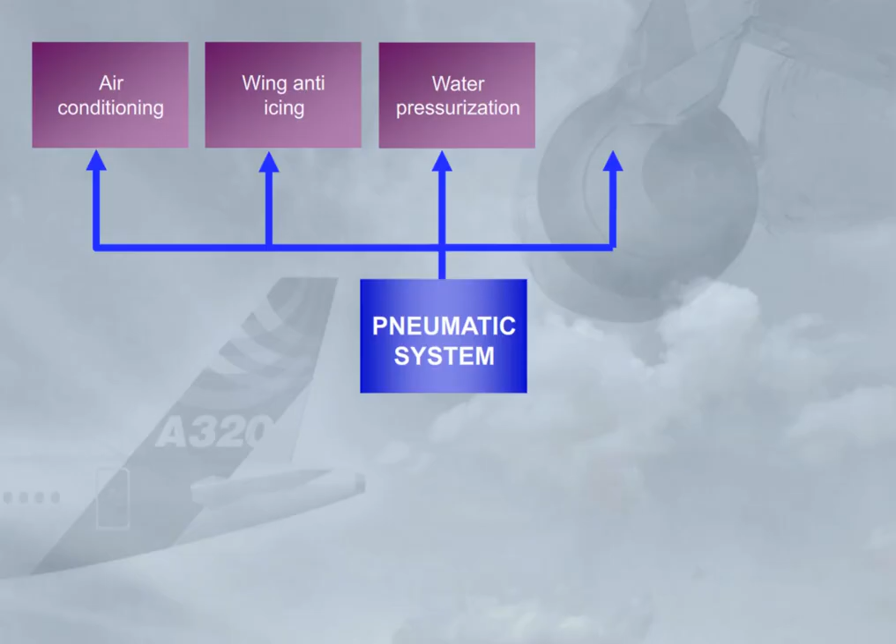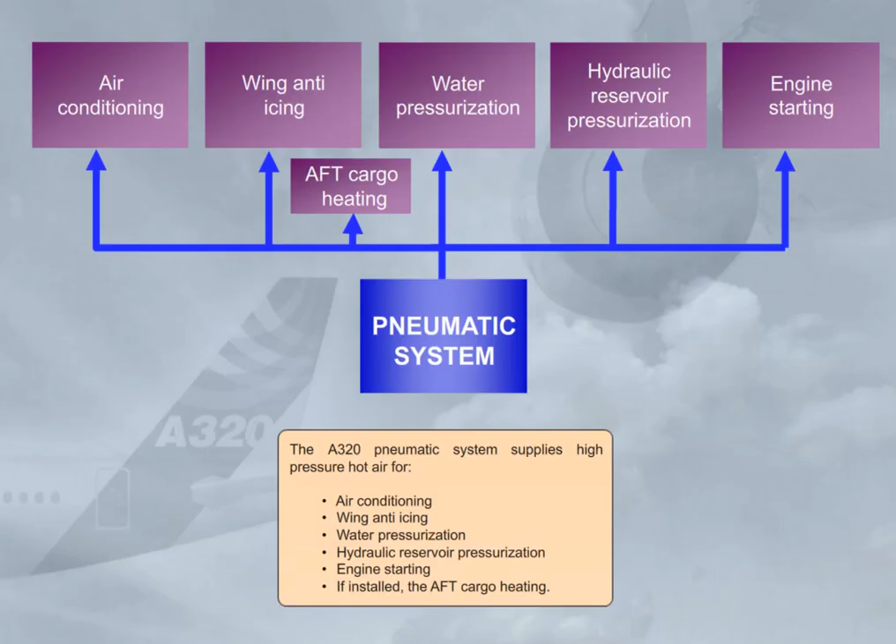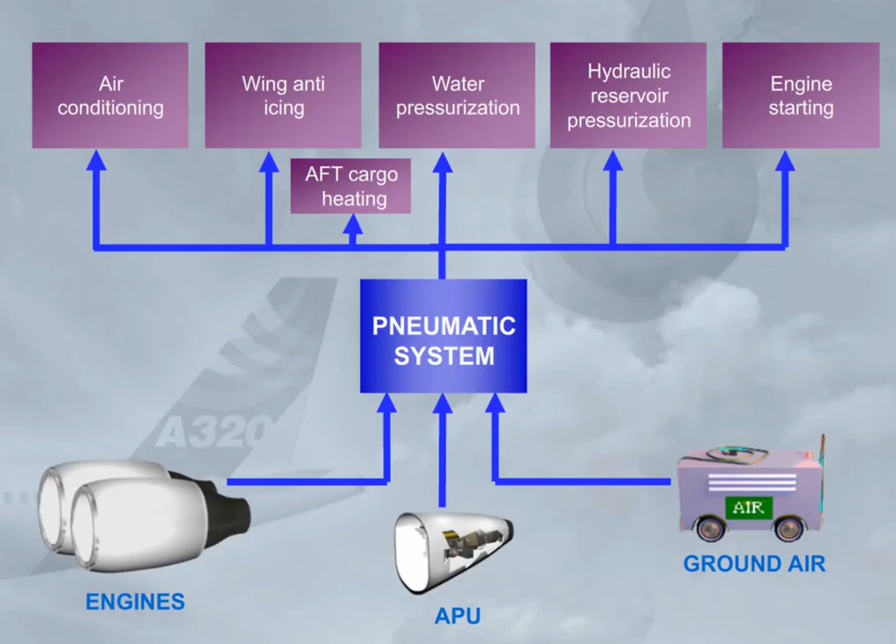The A320 pneumatic system supplies high-pressure hot air for air conditioning, wing anti-icing, water pressurization, hydraulic reservoir pressurization, engine starting, and, if installed, the aft cargo heating. High-pressure hot air can be supplied from 3 sources: the engine bleed system, the APU, or an external high-pressure ground air unit. Note: wing anti-icing is not permitted when the pneumatic system is supplied by the APU bleed.

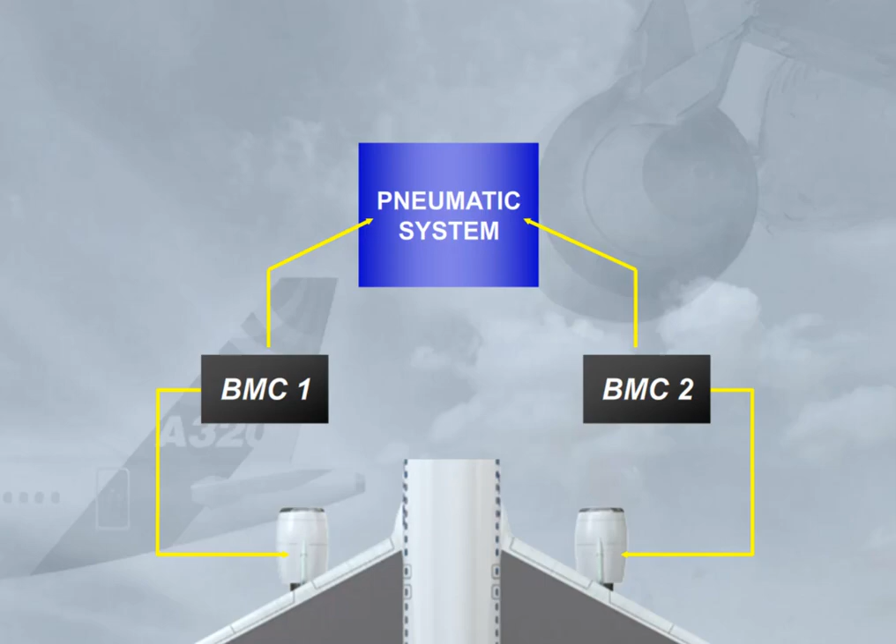The pneumatic system is controlled and monitored by 2 bleed monitoring computers, BMC. There is 1 BMC for each engine bleed system. Both BMCs are interconnected, and if one fails, the other takes over most of its functions.

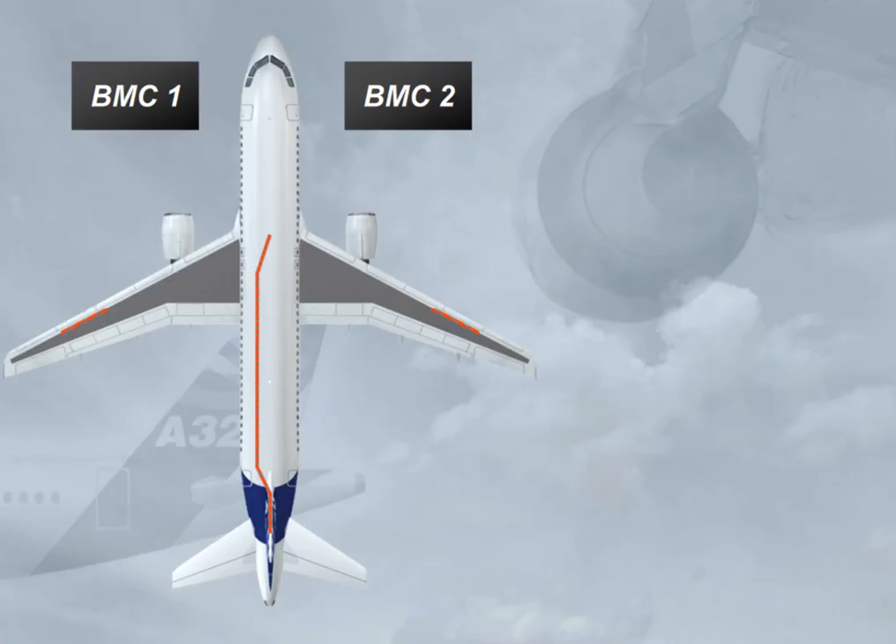An ambient overheat in the vicinity of the hot air ducts, in the fuselage, wings, and pylons will be detected by air leakage detection loops. If a leak is detected, a signal is sent to the BMCs, which automatically isolate the affected area.

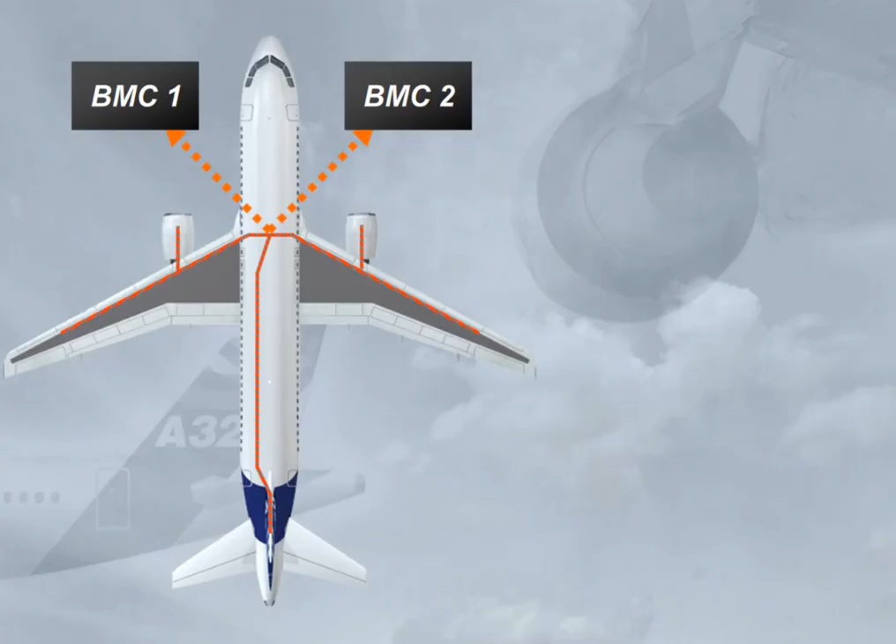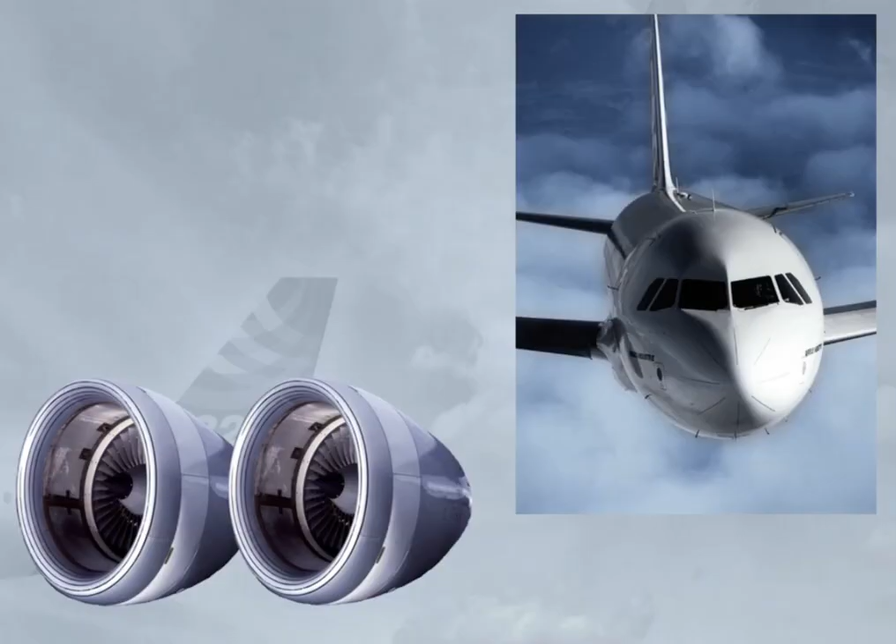In flight, the primary source for high-pressure air is the engines. Both engines have similar bleed systems. Air is bled from 2 compressor stages of the engine, the intermediate pressure IP port and the high pressure HP port.

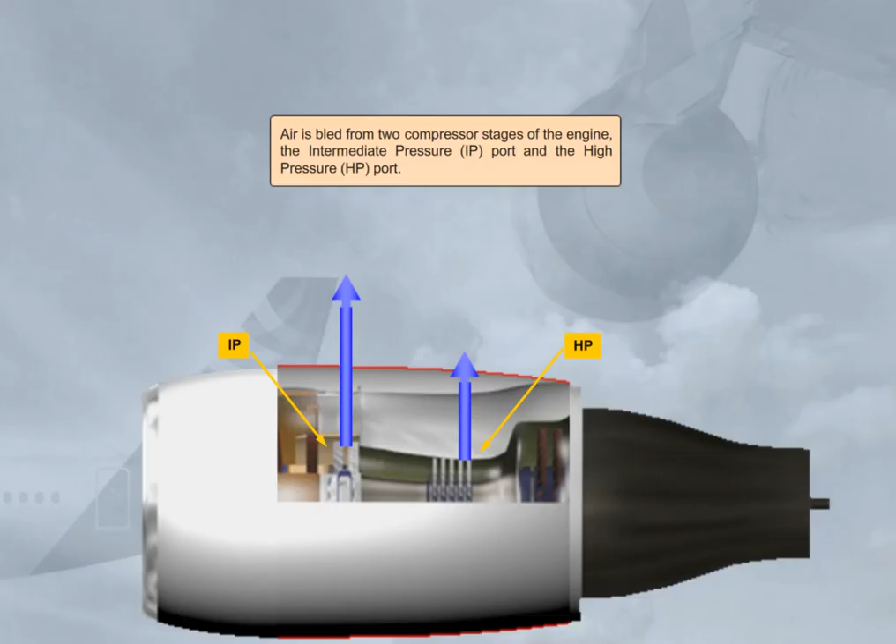There's an HP valve, which can cut off bleed air from the HP port. It is automatically controlled by the system and will limit the downstream pressure. Note: there is a non-return valve at the IP to protect the compressor against a reverse flow from the HP.

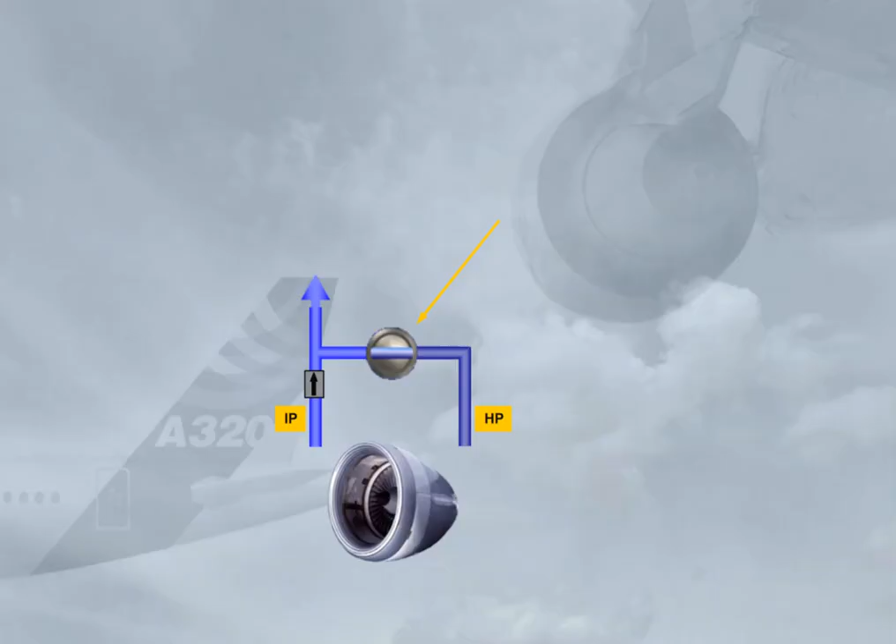The high-pressure section, HP, is only used when there is insufficient pressure from the intermediate pressure output, IP, due to the low engine compressor speed. Once the engine compressor speed is high enough, the IP is sufficient and the HP valve closes.

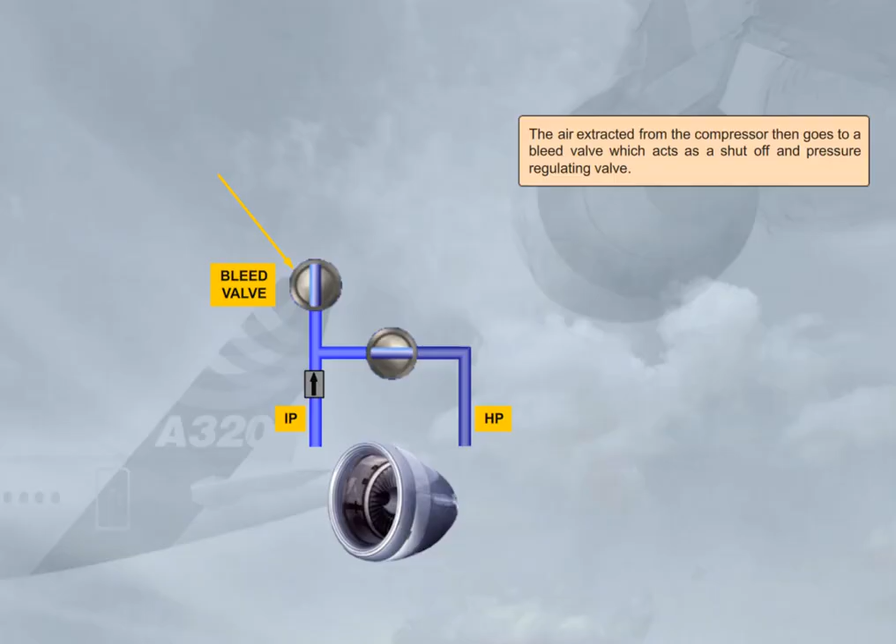The air extracted from the compressor then goes to a bleed valve, which acts as a shutoff and pressure regulating valve. Since the temperature of the bleed air is high, it passes through a precooler before being distributed to the users. The precooler heat exchanger uses cooling air, bled from the engine fan, to regulate the temperature according to the demand. Note: an overpressure valve, OPV, will automatically close in case of pressure regulation problem.

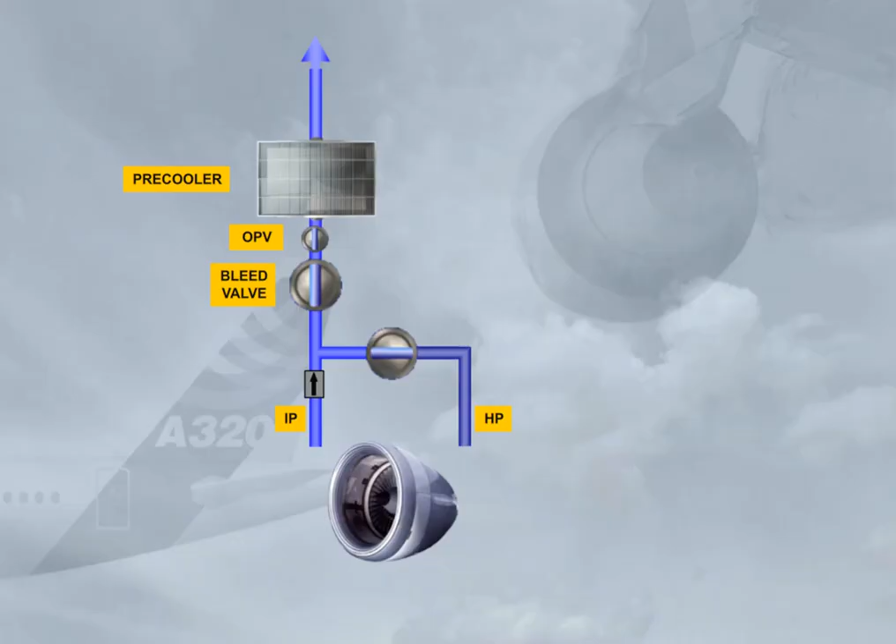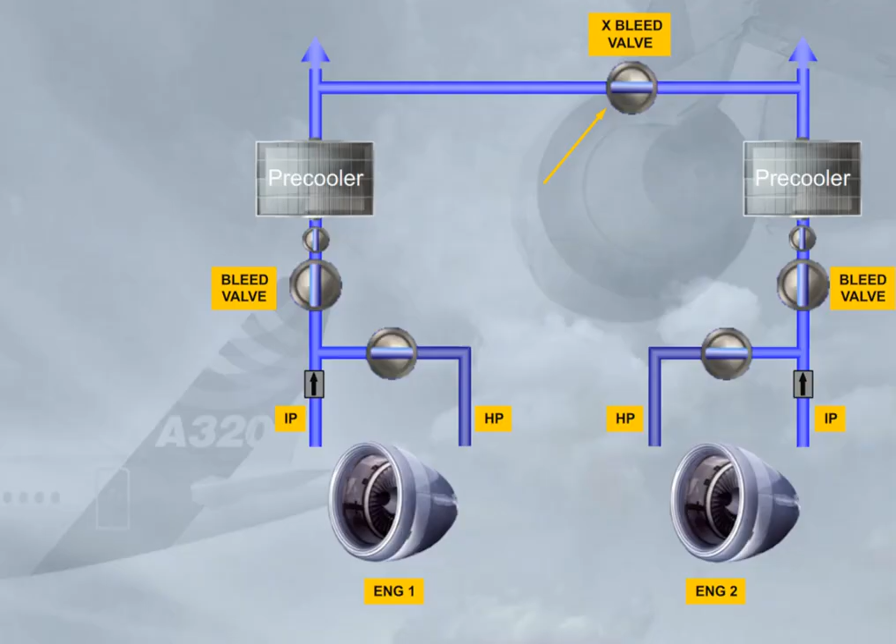Engine 2 has an identical bleed system. Both systems are connected by a cross-bleed duct. A cross-bleed valve permits their interconnection or isolation.

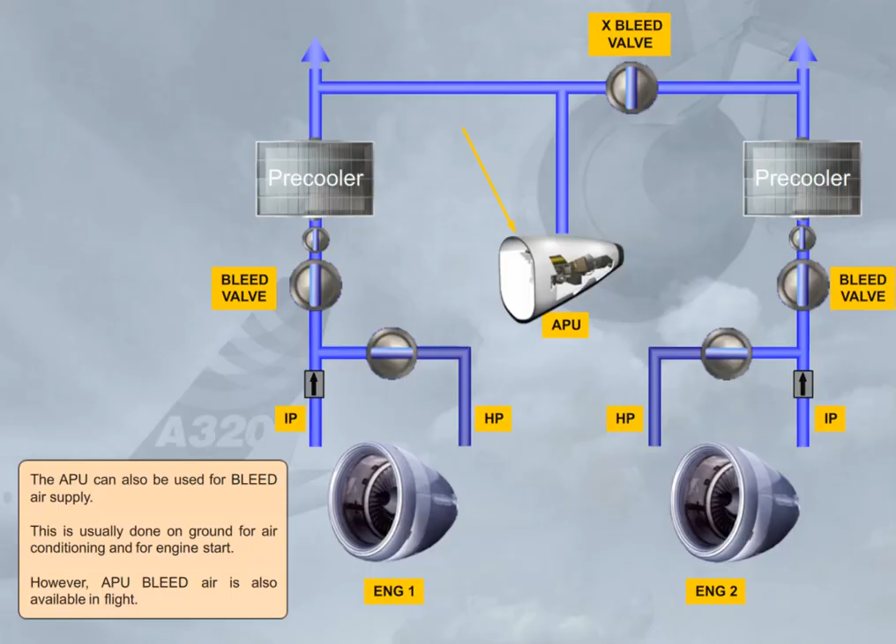The APU can also be used for bleed air supply. This is usually done on ground for air conditioning and for engine start. However, APU bleed air is also available in flight. APU bleed air is controlled by the APU bleed valve, which operates as a shutoff valve. Note: a non-return valve protects the APU compressor against a reverse flow from another supply source.

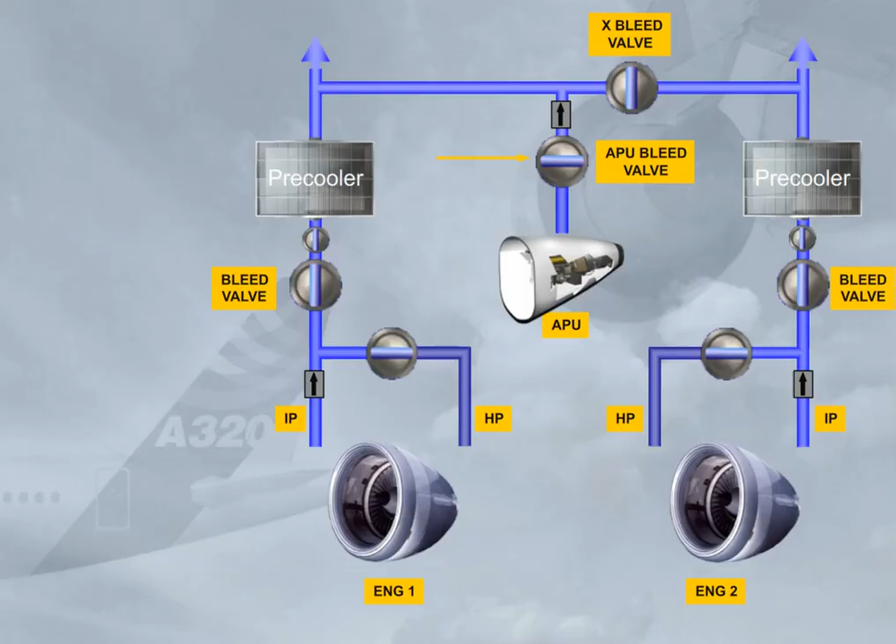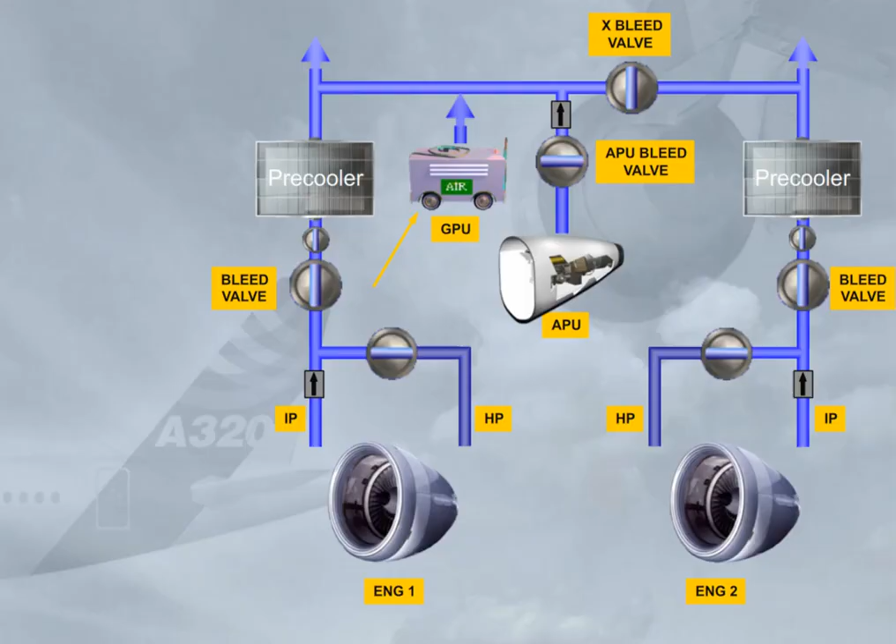Should the APU not be available, a high-pressure ground power unit can be connected. This completes the pneumatic system. We will now show you how system information is displayed to the pilots.

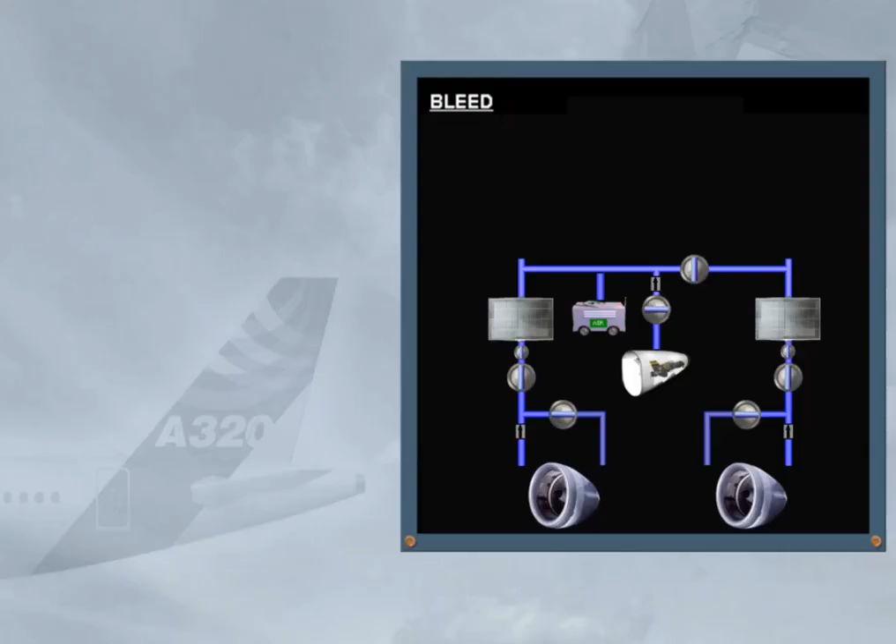Information on the pneumatic system is displayed on the lower part of the ECAM bleed page. Note: we have shaded the upper part of the ECAM bleed page because it is related to the air conditioning chapter. This will be covered in a later module.

Let's identify the system components on the ECAM page now. The IP and HP ports, the HP valves, the engine bleed valves, the precoolers, the APU bleed valve, only when APU is running, the cross bleed valve, and the high-pressure ground indication, always displayed on ground even if the ground unit is not connected.

The following information is also displayed: precooler inlet air pressure, precooler outlet air temperature, and engine identification numbers.

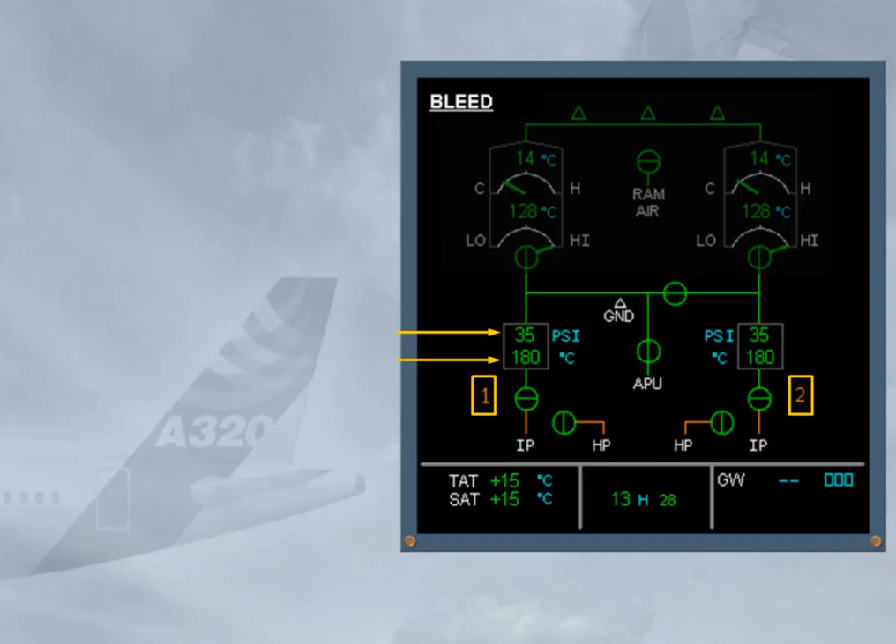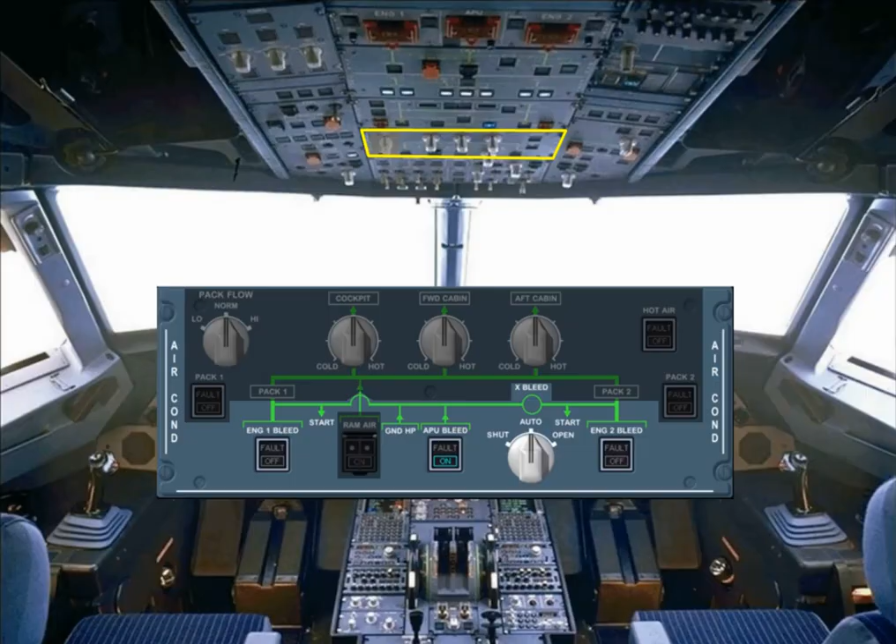Controls for the pneumatic system are part of the air conditioning panel, located on the overhead panel. Again, we have shaded the controls which belong to the air conditioning chapter. Each engine bleed valve is controlled by its associated push-button switch on the air conditioning panel.

The APU bleed valve is controlled by its related push-button switch. The cross-bleed selector switch enables the pilot to open and close the cross-bleed valve manually, or to let the system operate the cross-bleed valve automatically.

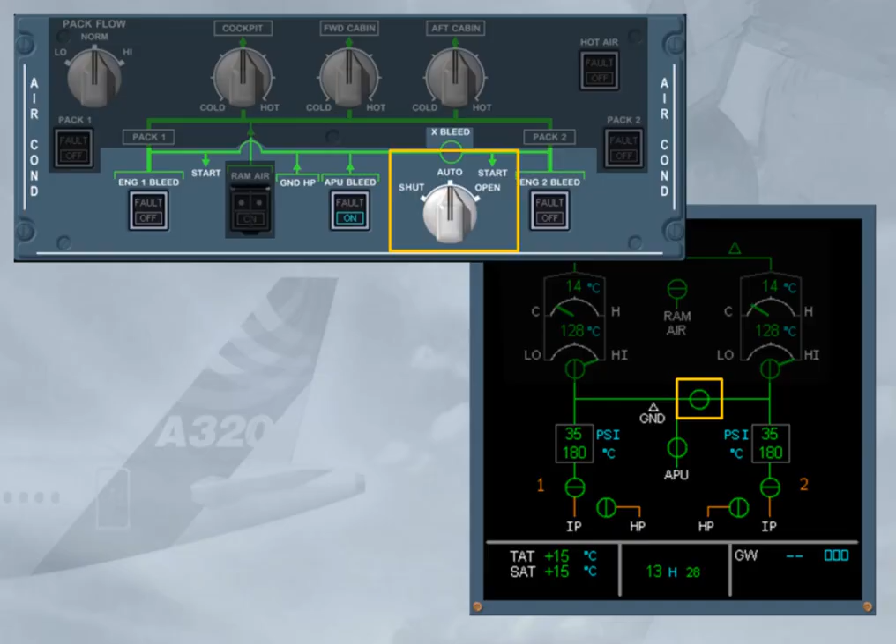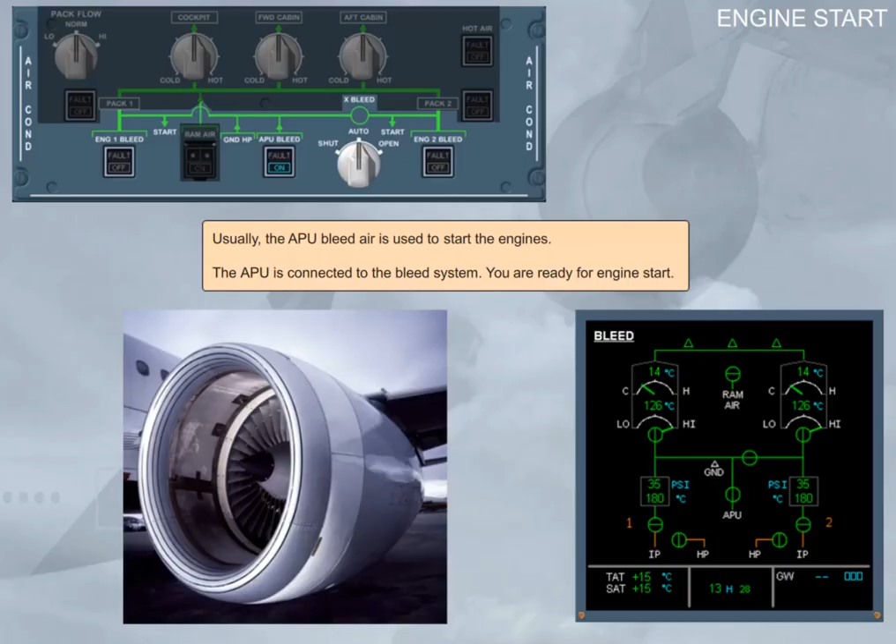Usually, the APU bleed air is used to start the engines. The APU is connected to the bleed system. You are ready for engine start.

Notice that the engine identification numbers have turned white, indicating that the engines are running. The engine bleed valves remain closed because the APU bleed valve is open, and the APU has priority over the engine bleed. We can now switch the APU off.

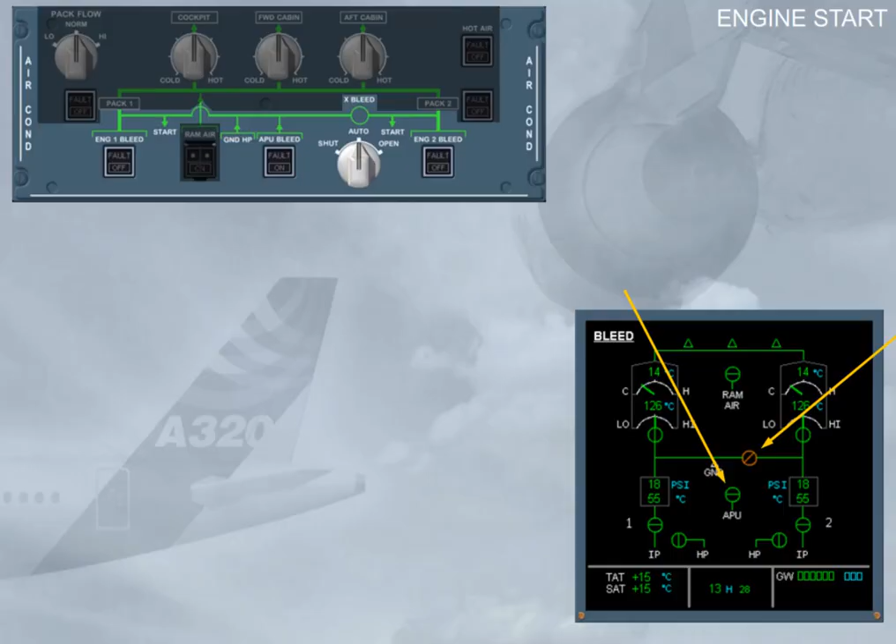Observe the ECAM. The APU bleed valve is closed. The cross-bleed valve is automatically closed. It is displayed amber during transit. The engine bleed valves and HP valves are displayed in line green because they have been automatically opened.

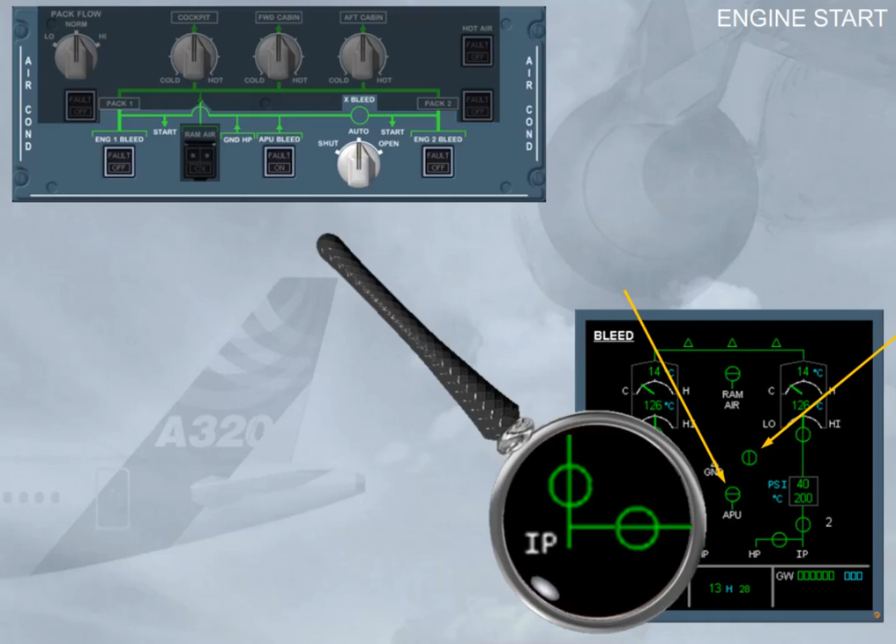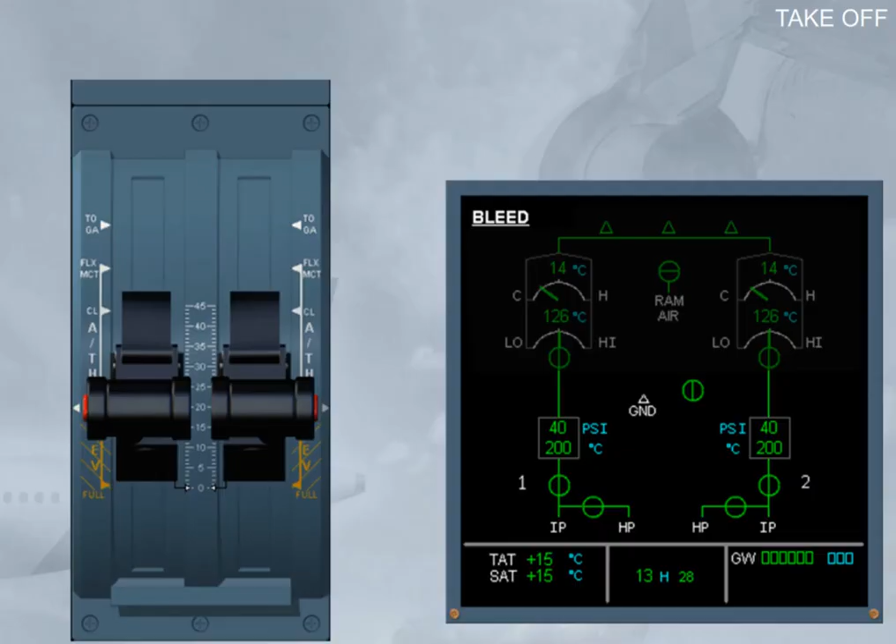We will now talk about the changes that occur in the pneumatic system during takeoff. Note, normally, the ECAM engine page is displayed for takeoff. For training purposes, we will display the ECAM bleed page.

As engine thrust is increased, the pressure delivered from the IP stages is sufficient, and the HP valves are automatically closed accordingly.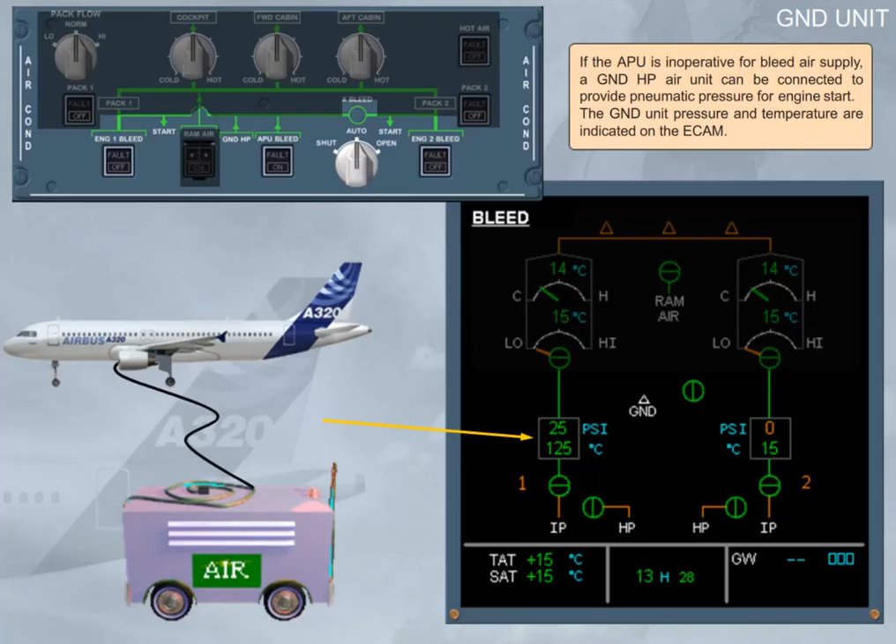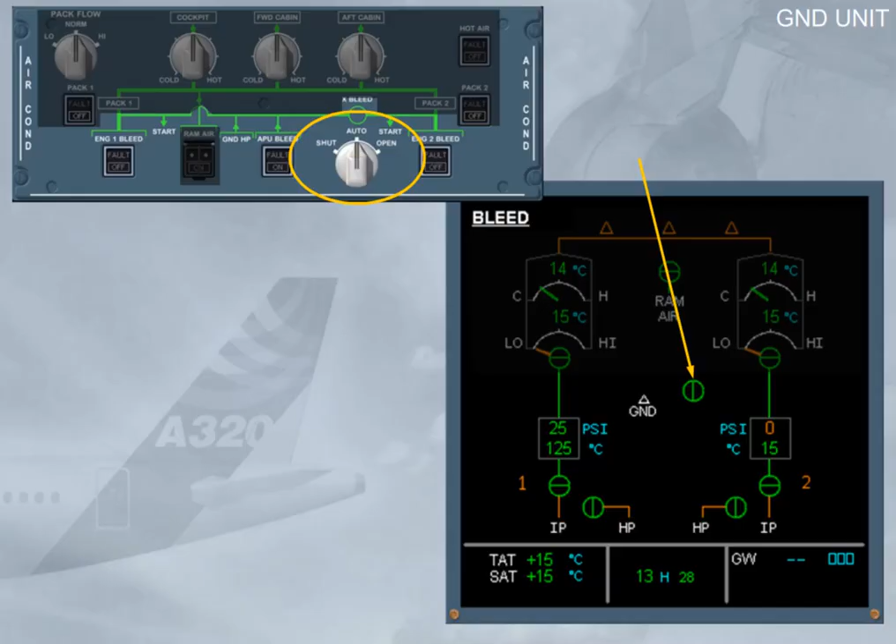Notice that, in this case, the cross-bleed valve remains closed with the cross-bleed selector switch in the auto position. In order to start engine 2 first, you have to manually set the cross-bleed selector switch to open. This is done according to a procedure in your FCOM PRO-SUP 70 section.